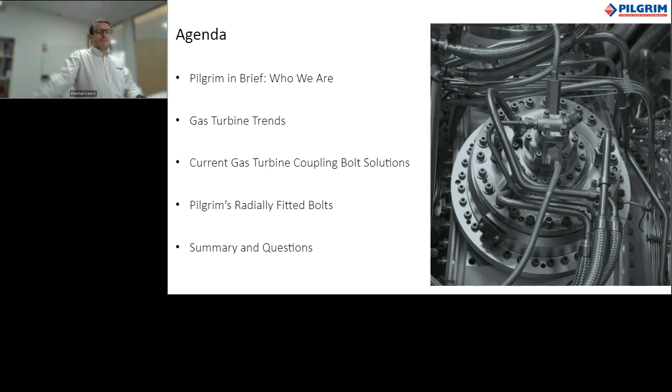So, who are Pilgrim International? I'll give you a brief insight into who we are. What do Pilgrim do? We are an engineering company with a vision to create a world of trouble-free connections. We focus primarily on high-integrity joint fixings, whether static or rotating, and we have a number of technology platforms that support this.

We have the bolting and positioning offer that we'll talk to you about today. We also have bolt tensioning systems and hydraulic drive-up systems. We provide a number of services to the market, including training and on-site machining, and we also have a hydraulics pack offer to support the installation and use of the majority of our products.

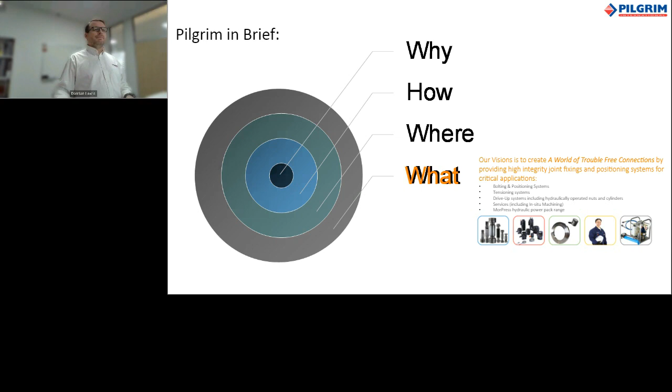We're a company based in the UK, with manufacturing in Sweden, and we sell to over 55 countries directly over a large number of years. We also work through a number of agents and distributors, so we try to reach out to everybody in the marketplace.

How do we do it? We're a company with over 65 years in existence, and in that time we've gained a lot of experience creating known friction into systems. We have strong experience of oil injection methods, and we also have good knowledge of material expansion, which my colleague David will show you a little bit about in the product we present later.

We're also very experienced working with high pressures, around about 2,300 bar, and we know how to seal mechanical systems using these high pressures. We also couple that with a vast knowledge of some of our key industries, such as marine, or in this case, power generation, which we'll talk to you about today.

But why do we do it? We have a passion, and our passion is removing uncertainty for our clients. What we mean by uncertainty is reducing unplanned costs. So we like to create systems and solutions that are predictable and reliable. And what that means is that it improves the operating income for our customers, and also we like to try and improve the performance of our customers' assets as well.

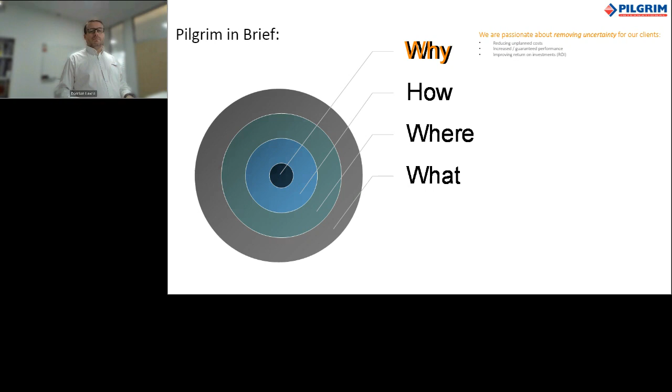So now what I'd like to do, now that I've introduced Pilgrim, I'd like to talk a little bit about how we see the trends in gas turbines. If I start with the macro view, the larger picture on what's happening globally, what we can see is that there's a lot of focus on decarbonisation, and I don't think I need to go into too much detail about that. If you just watch the news, you can see there's a lot of that going on at the moment, and rightly so.

But what does that mean? We see that there's a lot of focus on transitioning from fossil fuels to renewable and reliable sources of power. This means that there's a transition away from coal generation, and I saw a phrase the other day that it will be ultimately outlawed. So through government activities, the use of coal will become less and less.

So what that means is we see a lot of transition of power plants moving from coal and converting to combined cycle power plants, as an example, and the use of natural gas. And we see that will be a bridge until the new technologies that we're talking about, such as hydrogen, come on board.

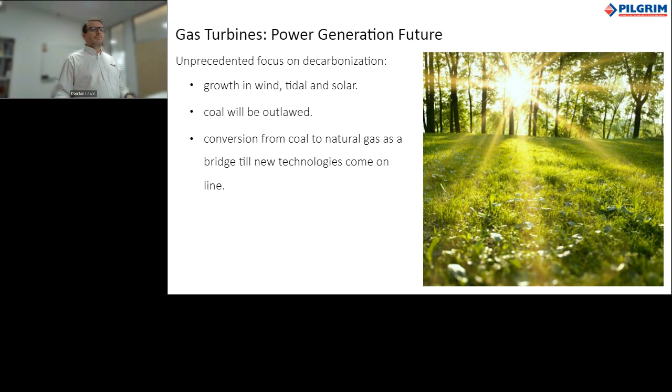And then we also see that there's a mixture of blending hydrogen and natural gases together. And that's a big activity for the turbine OEMs to come up with solutions on how to manage that transition of increasing the blend or the reliance on hydrogen and reducing the need for natural gas in the future. And then we also observe that nuclear is making a comeback from the last 20 years of having some bad press. Now it's being reconsidered as a reliable source for energy again.

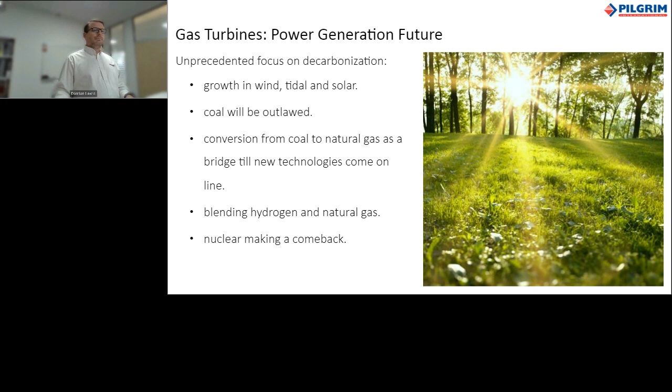So if we then look at what that means specifically for the challenges of gas turbines, we see that the gas turbine business will maintain and increase over the next 10 years or so. There are some aggressive targets for gas turbine development, so there's a lot of activity on how to improve. And where we see those are through efficiency improvements in the gas turbines, and I'll explain a little bit about that in some slides to come.

The compatibility with renewable energy sources and the pressure that will put on gas turbines is the ability to start up quickly and bridge the gaps where renewable energy sources can't meet. Maybe, for example, as a wind turbine, if there's no wind, we still need to have energy.

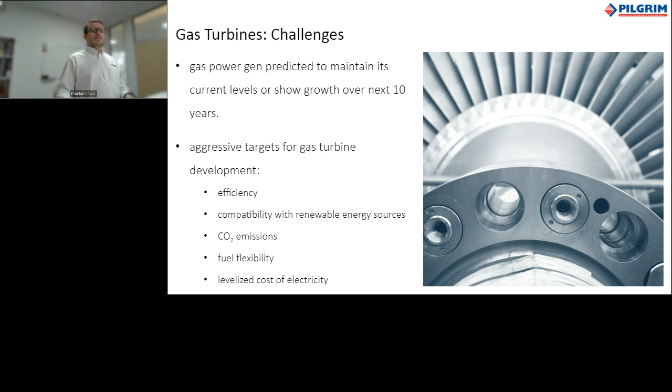There are three major players, GE, Siemens, and MHI, and they'll produce between 2018 and 2027 around about 3,000 gas turbines, which will be about 90% of the market demand. So there will be three major players.

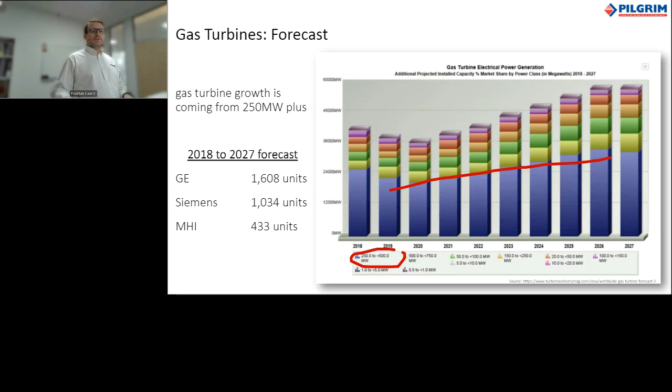And that has a relevance on the bolting solutions that are out there in the market, and we'll talk a little bit about that as we go along.

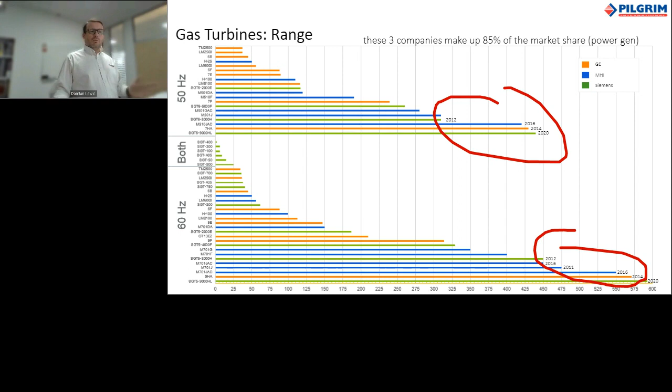However, what that means for the bolting is that it needs to cope with more torque going through the system. So the bolting solution that was designed back in the 90s might not be the right bolting solution in 2016.

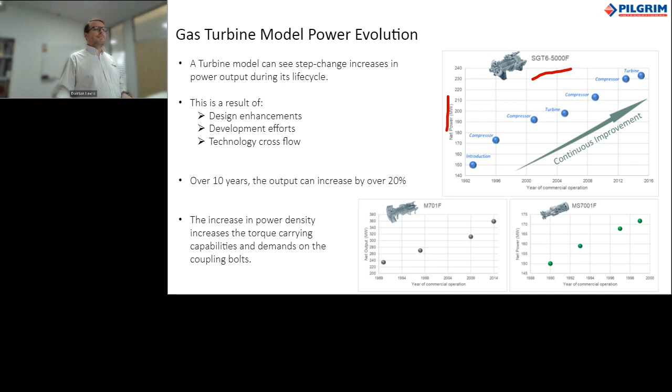So what I'd like to do now is just spend a few minutes to talk about the basics of coupling bolting. What is the basic activity of a coupling? Its functionality is basically to transmit torque.

When you have a flanged coupling, you need to bolt it together. I'm going to explain two methods that we see in the marketplace that are quite common. You have friction-driven solutions, and basically they are a low-cost solution that are transmitting axial preload by clamping the two coupling halves together.

And through friction, that drives the torque through the system. The thing we see here is that they create small transmissible torque, so they can only really be successfully used on smaller turbines.

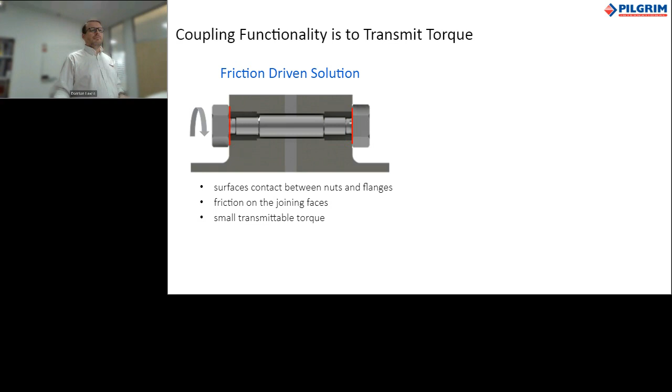What we then see is shear-driven solutions. The solution we're showing you here is a combination of shear and friction, denoted by the red areas. How that works is the torque transmission is actually transferred using contact area between the bolt and the couplings to drive the couplings, both through the diameter of the bolt connecting with the bore of the coupling, and also through the face of the nuts to the coupling frictionally.

And again, this seems like a really good solution. However, there's some issues that we can see, and I'll explain those as we go into the next slides.

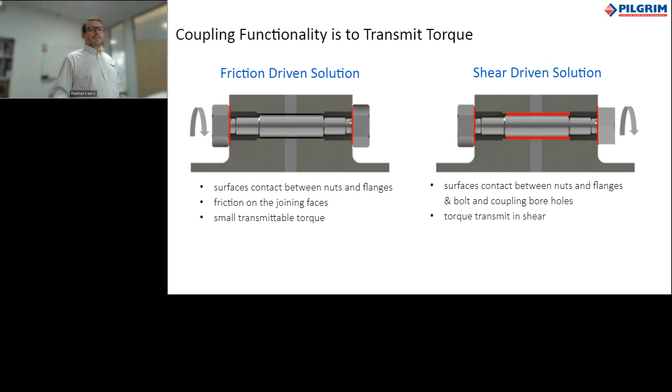So first of all, I'll talk a little bit about the friction solution. It's a low cost solution, and it's very common in the marketplace. The issue that we see is that it can create unplanned costs because the bolting solution can fail.

What we mean by fail is that there can be stuck bolts. When the bolt is in situ and actually in operation, there can be some shock loads created, which means there's some micro movements. Because there's clearance in the system, the bolt can get jarred and get stuck, and with that comes some downsides of trying to remove the bolt and some additional costs.

The other issue that we see is that each bolt in the coupling cannot be uniformly loaded, so there's some difference between each bolt.

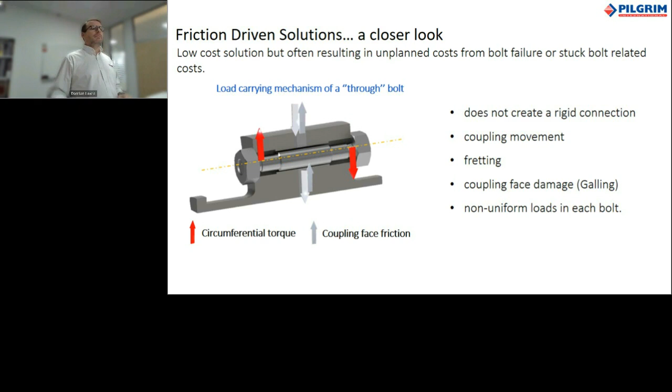If we then look at the shear solution, these are called fitted bolts, but in the main they have some element of clearance to be able to assemble them into the hole, even if it's just a very small dimension. However, there is some clearance.

And what we see as well is that when the bolt is actually tensioned, this also stretches the bolt, which means the shank diameter of the bolt, which should be in contact with the coupling, can actually reduce in size slightly, creating an even bigger clearance between the coupling and the bolt itself. This allows for micro movements under dynamic loads.

What that then means is that the bolt can actually angle itself and get stuck, again creating a stuck bolt situation when trying to decouple. So we often see that there's a seized bolt situation with these solutions.

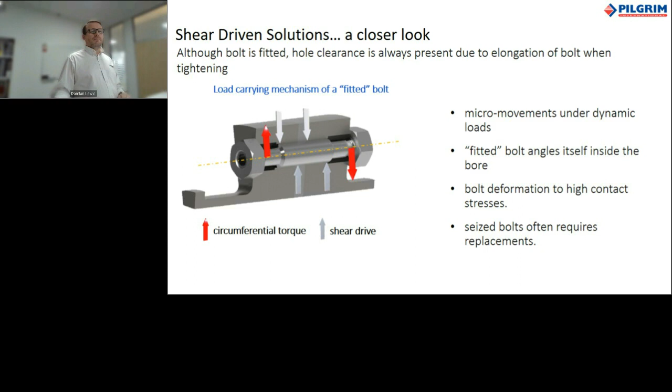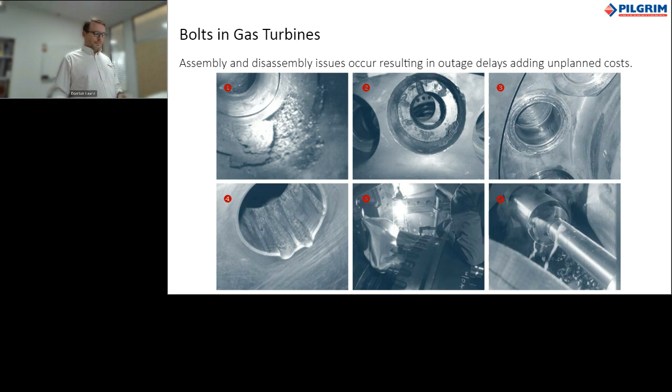So, as I said before, so what if this happens infrequently? But in our experience of being in the power generation business for over 35 years, we don't see this as an irregular occurrence. And we undertook a survey in 2020.

We asked one very simple question to a user group of gas turbine users: how often do you experience seized coupling bolts when you're splitting a coupling during an outage? The feedback was quite alarming, but not surprising. We saw that 80% of people splitting couplings actually experienced some level of stuck bolt situation. And of that 80%, 50% experienced it very often.

This is really why Pilgrim exists, because we want to solve this issue. We want a situation where our customers and clients don't experience stuck bolts, because we recognize some of the pain this causes our customers.

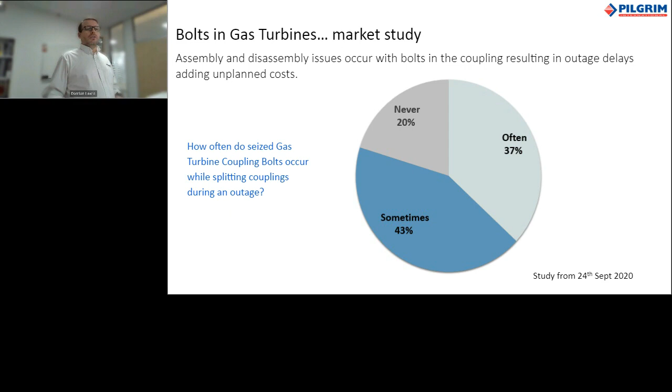So before we move on to a small quiz, I'd like to give a conclusion and show you the regular bolting solutions in the market today. I talked a little before about friction and shear driven solutions, and what we see is the classic torque-tightened clearance bolt. To summarize, it transmits low frictional forces, it can create coupling damage, and it's very common.

It doesn't retain its loads, or it's inaccurate. And we see that coupling slippage is quite common, especially when you hit some dynamic loads coming into the system. So what we then see is that some companies have actually created a hydraulically driven friction bolt.

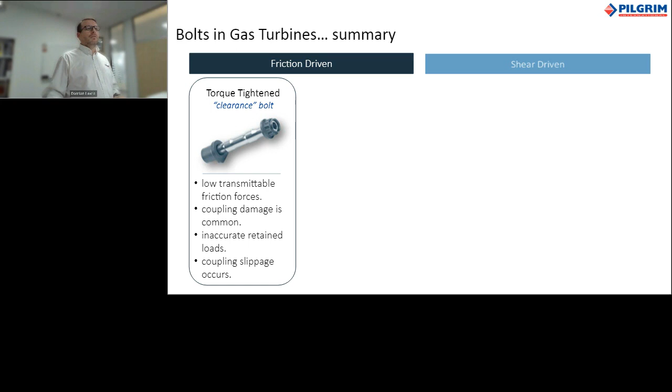These need massive preloads, which means the solution is designed right to the end of the envelope of its operational ability, and it needs that to create the preloads. But that comes with some risk, because you need quite a lot of safety equipment, which can be quite bulky and complex to manage.

There's a puller, which I'll highlight here. Because that is put under quite a lot of stress when used, there is a finite life and it needs replacing. There's a very low factor of safety. So again, if the system experiences some shock loads, the bolting can quite often get stuck.

So what we see is some people driving towards using shear bolts, because in theory it's a better solution. We see what we call fitted bolts, and as I mentioned, these are normally not truly fitted. David will explain a little bit about what truly fitted means in his section.

But what we see is that when you have a hydraulically installed tension bolt, you can still get micro movements because of the clearance inherent in the system, as I mentioned before, the reducing shank diameter. This also creates coupling slippage, and the coupling bore and face can get damaged.

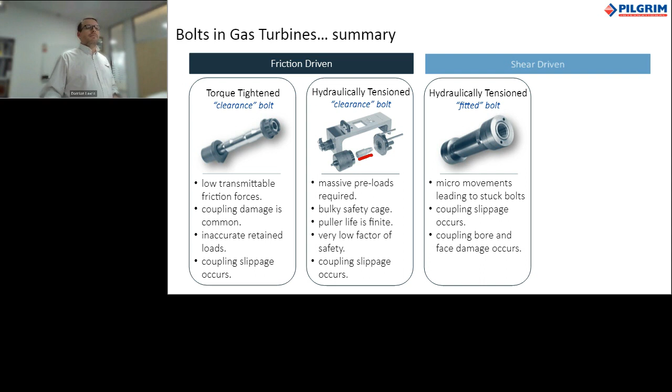However, we see some issues with the design as well. The nuts can be a little bit bulky because there's quite a lot of mechanical parts, and these mechanical parts are subject to failure if there's an ingress of dirt. It can be quite time consuming, because if you imagine you have a coupling with 24 bolts, you have 24 times 16 bolts to tighten up, and this can be quite time consuming. And there's no alternative removal method, so if the mechanical method fails, you're then stuck with actually drilling the bolt out.

So that concludes my section. What I'll do now is move on to a quick question. As I said before, if you could give some feedback, that would be great, before Dave talks about the 5th option that we have, in addition to the 4 options we've shown here.

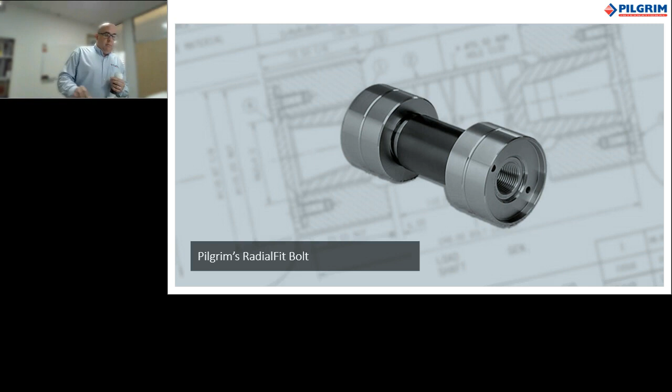Imagine a bolt what is OEM approved. It's retrofittable, repeatable, predictable, reusable. Due to its design, it has an extended product life. It allows accurate outage planning during the critical path stage. It offers a quick return of investment. A bolt what's really easy to install, but even easier to remove. And it eliminates any coupling damage, so it avoids any costly redress of the application.

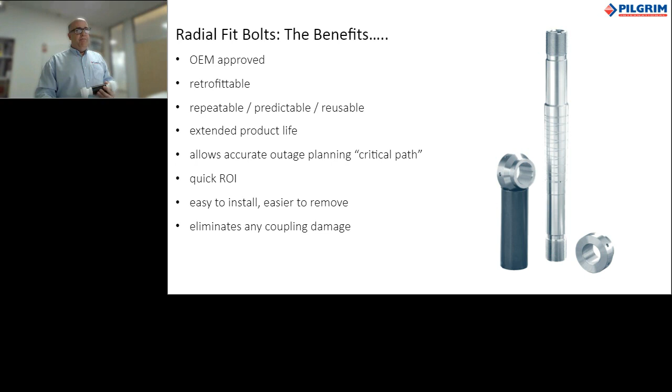So what is this bolt? This bolt is a Pilgrim Radial Fit Bolt, a true radial fitted bolt. And how does it work? Like most bolts, it works with 2 nuts, a bolt and a sleeve, but this bolt is a little bit different. It has a male taper, and within the sleeve it has a female taper, which corresponds with each other.

The bolt is designed to deliver the torque required for the application in both shear and friction combined. The bolt will carry the torque of the application mainly through shear, with a very small percentage through friction.

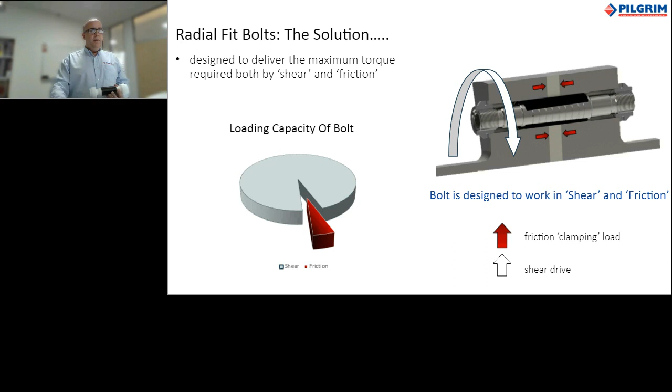So what really is the true benefit of this bolt? We can see here a great example of a 70mm diameter hole with 16 bolts in the coupling. We like to define two zones: a safe zone where no slippage occurs between the flanges, and a slip zone where slippage occurs. And when we talk about slip of the application, we talk about stuck bolts, because that's where it's likely to happen, and this is something Pilgrim wants to avoid. So we see a clamp bolt, a friction only bolt, a traditional bolt as we would call it, just sitting right above the safe zone.

Above that we see the Radial Fit Bolt, which offers a bigger capacity, around about 5 times bigger than the base load what a traditional bolt can offer. So what we see...

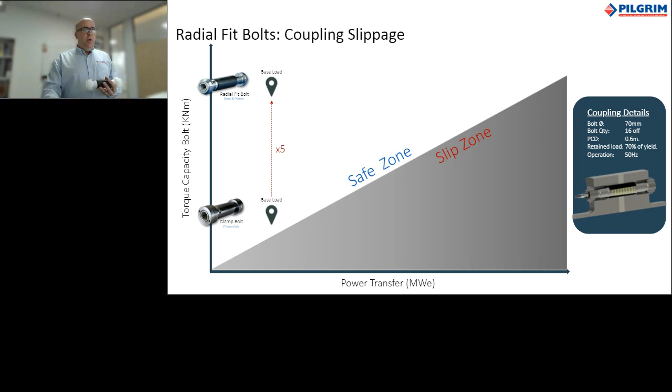As the power starts to increase, the torque capacity increases also. And it's very clear to see in this example that the clamp bolt, the friction only bolt, starts to slip as the power increases, where a Radial Fit bolt just carries on to around about 6 times the base load. And that is not just for operational torques, that also takes into consideration any shock or out of phase torques what can occur during the operation.

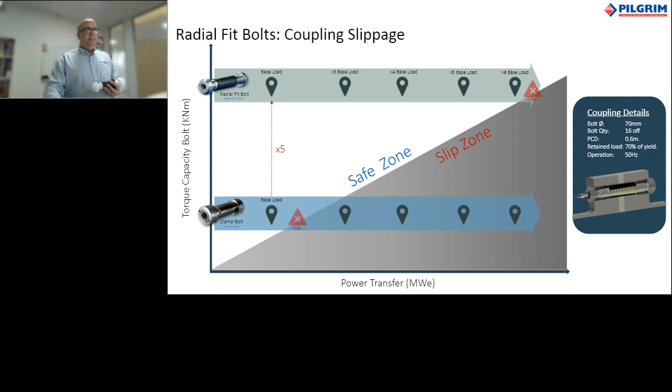So quite simply, how does this bolt work?

So, like I mentioned earlier, we have a Radial Fit bolt with a male taper and a sleeve with a female taper, which corresponds to each other. The bolt is inserted in a clearance condition. And when we start to control expansion of the taper sleeve by using hydraulic equipment, we slowly position the sleeve within the coupling and we start to pull the bolt through the sleeve. And as we draw the bolt through the sleeve, it creates an expansion. And it's that expansion what gives an interference fit. Again, a truly fitted bolt.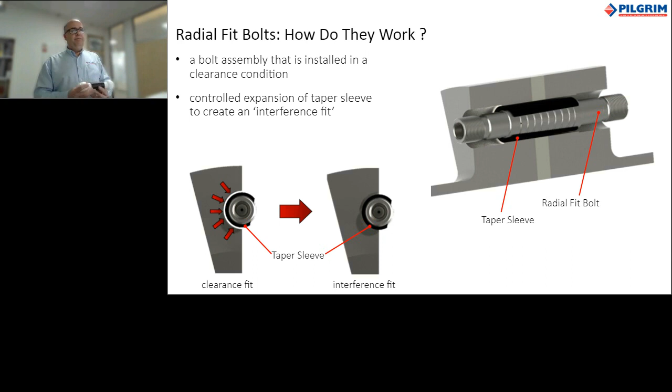So we talked about not only does the bolt work through shear, the bolt also works through friction. And we do this by, again, using hydraulic tooling to create a controlled stretch of the bolt to put a load into the system. This high clamping load not only ensures that the coupling faces come together and create some additional torque to the system, but it also locks the round nut into place. And it's that high load what stops the nut from coming loose during operation. So no need for any anti-rotation devices, something what you can see on quite a lot of conventional bolting systems.

Because everything is hydraulically controlled in a safe manner, there is no coupling damage. So again, no costs to redress the coupling, which not only costs time is money, but also getting expensive equipment onto site to redress that damage. And all in all, it takes less than 15 minutes to install and remove the bolt.

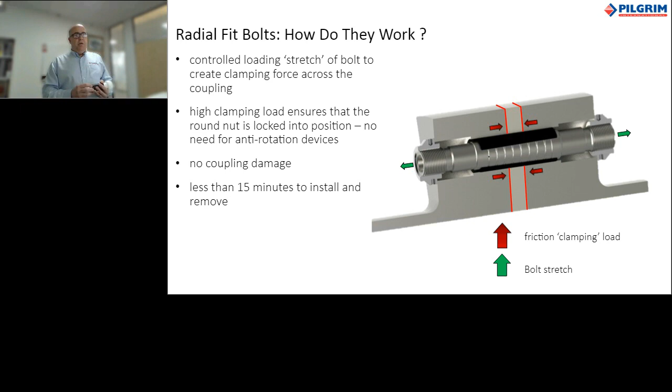So we talk about how easy it is to install. The true magic really happens when we remove the bolt. And we do this in a number of ways. We have a specially coated sleeve to aid removal. We then start to apply high pressure oil between the bolt tapered surface and the sleeve internal tapered surface. With that, the bolt will remove very quickly, and I will show you a video a little bit later of that process.

But if that process was not successful, we designed a fail-safe where we have a secondary method to remove the bolt in a safe manner. And again, with all stages of removal, we ensure there's no damage to the coupling nor the product. And again, very quick to remove, takes less than 15 minutes to remove each bolt.

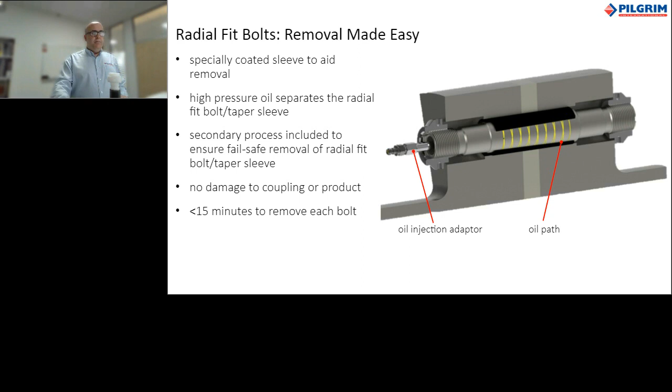So here, like I said earlier, I'd like to show you a quick video of how quick, using the oil injection method, the bolt comes free from the system.

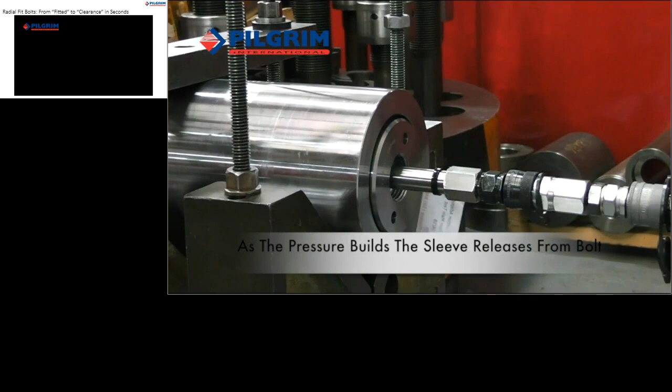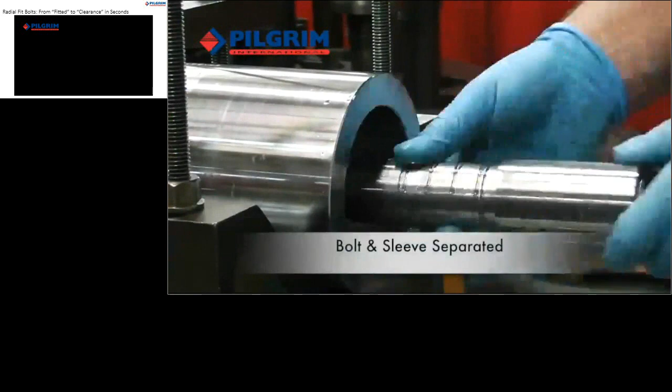So as you can quite evidently see there, very, very quick and easy to remove a bolt. And I think we all can say that it's a lot easier and a lot better than trying to remove a seized bolt in the coupling. The frustration and the time that causes, we remove that uncertainty.

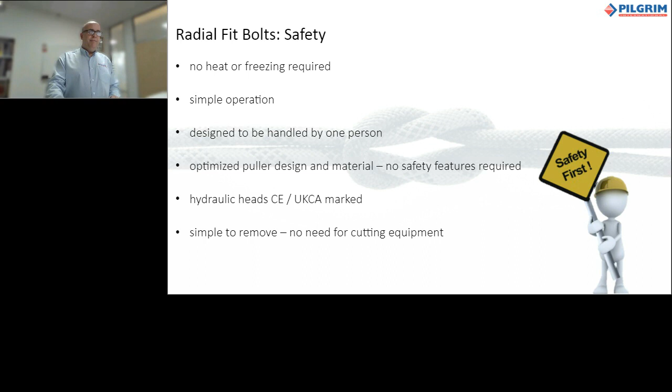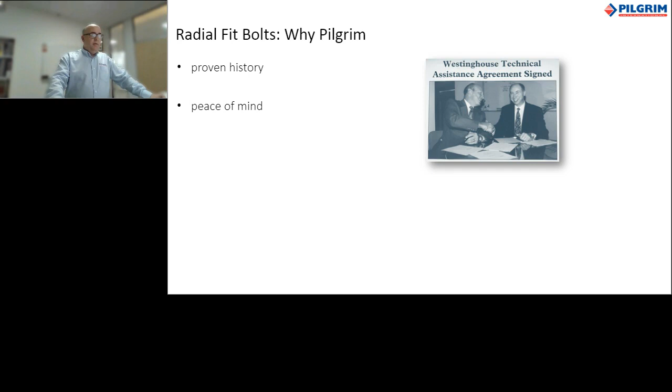We offer peace of mind. We've got our bolts in roughly 500 power plants worldwide, and this roughly equates to around about 25,000 bolts. And it's those bolts we have 0 reported design defects. So we're very, very confident, not just with our product performance, but also our quality.

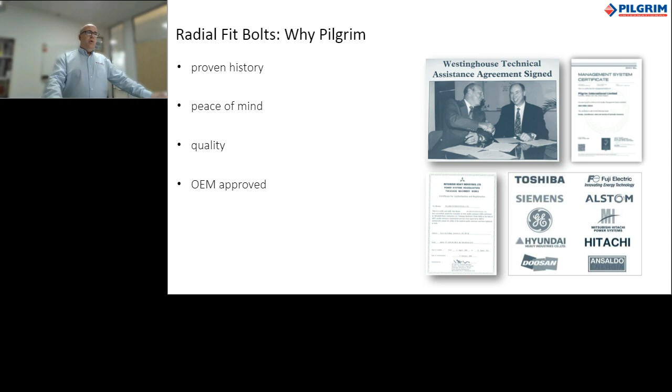As Damien mentioned earlier in the presentation, we work with a lot of the OEMs, and they approve our product to be worked on their turbines. We have unrivaled after sales, whether that's technical support or field support. Pilgrim are always on hand to support the customer.

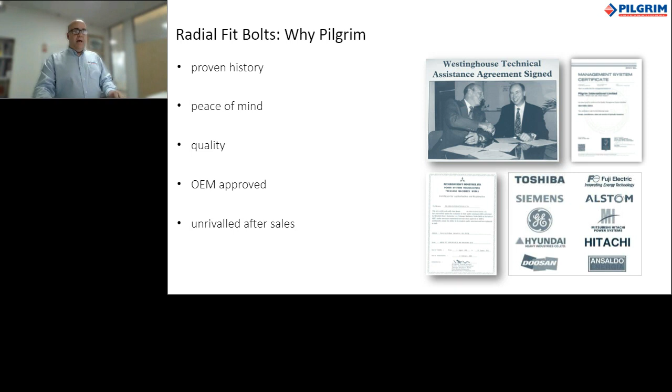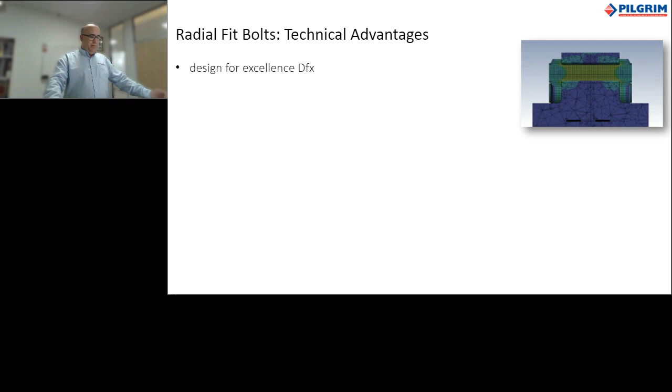So the technical advantage of our Radial Fit Bolts is that we have design for excellence. What I mean by that is we utilise the latest 3D modelling software, fused with the latest finite element analysis technology, to ensure that whatever we design is the best solution for your application. We have a unique puller design, whether that's the geometry we've optimized over the years, the material selection, or the thread geometry.

We ensure a puller which is safe to use, with no need for a safety device. We've had zero reports of any defects with our pullers.

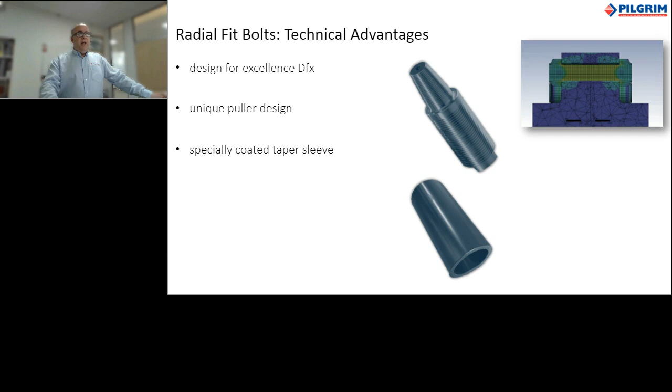We have a specially coated sleeve, a double helical groove, and an oil injection adapter which has a hardened lens ring attached to it, ensuring a full sealing system against the bolt. Combining all three of these special features into our product aids the removal. So we have a simple but effective removal system, because we realise that's where a lot of headaches come for users when removing the product. By combining those three technologies, we ensure a safe removal of the product.

Finally, with all bolting, we only use the best approved mills for our material, which allows us full material traceability through the system. So we can ensure that the product that lands at the power station, power plant or utility is more than fit for the job.

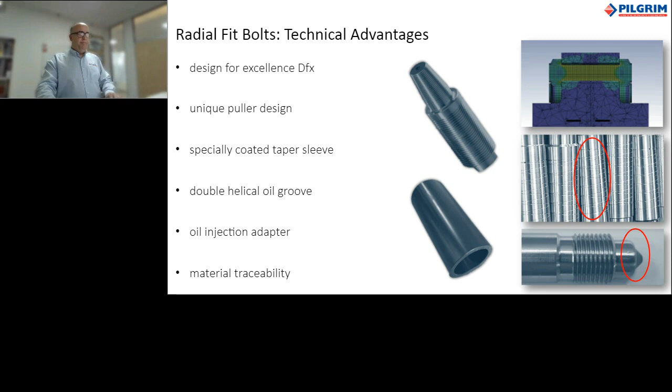So I've got a question here. I've got 3 power plants: Kaiga generating station in India, Heysham 2 power plant in the UK, and Pickering Unit 7 in Canada. What connects these 3 power plants together?

Well, the answer is at one point they have all held the world record for continuous operations, with Kaiga generating plant being the current world record holder with 962 days.

They also have another connection, and that connection to Pilgrim is vital. They are all equipped with Pilgrim Radial Fit Bolts, and we are proud that on all occasions when these units have been taken offline for necessary maintenance, all Pilgrim bolts were removed and reinstalled without any reported problems. Time delays were avoided, and the coupling managed to get back online and generating electricity in such a short space of time, all in perfect working condition.

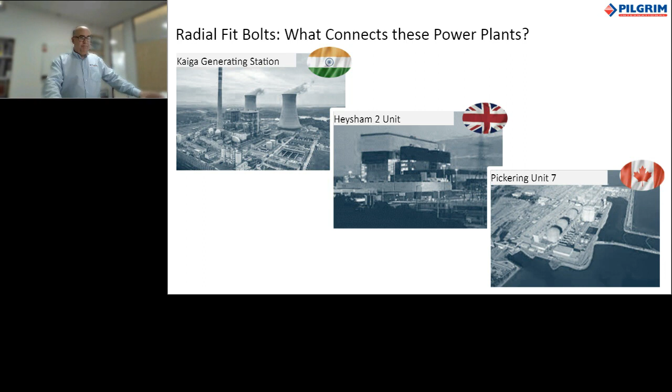So, like Damien said right at the beginning of my presentation, or I think it was Ivan, I've been at Pilgrim for 25 years.

So, the bolting system - we like to say it's designed for life. And we design based on our field experience. What I mean by that is Pilgrim is a listening company. We listen to our customers, we value feedback.

Myself and our expanded service team have been fortunate to travel to many of the power plants that have our product installed. Working very closely with the operators of the equipment, we sit down and take feedback. We take that valuable information and put it back to the design team here at Pilgrim, and we continually evolve the product so we can take it into the next generation by making incremental improvements all the time.

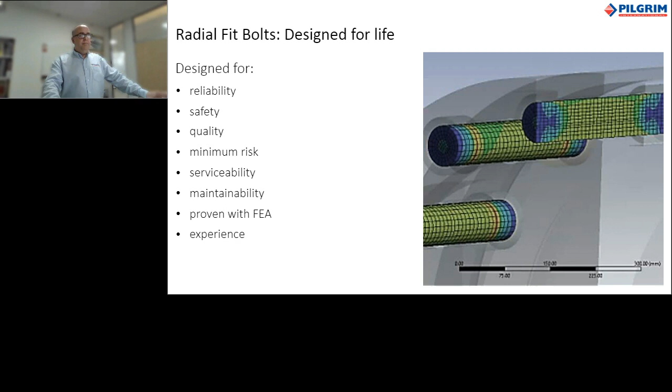So I would like to end this presentation with a quick quiz. I would like to ask a question with a number of multiple choice answers. I'd like you to spend a couple of seconds choosing your answer and then locking that in with the submit button.

So, question 1: which power plant has a world record for continuous operation? Kaiga generating station in India, Watts Bar in the USA, or Maanshan power plant in Taiwan? I'll give you about 20 seconds before locking your answer in.

Okay, so that's what I would expect. Yes, you're correct with Kaiga generating station in India. And yes, we're very proud that that holds a world record with 962 days in continuous operation with Pilgrim Radial Fit Bolts.